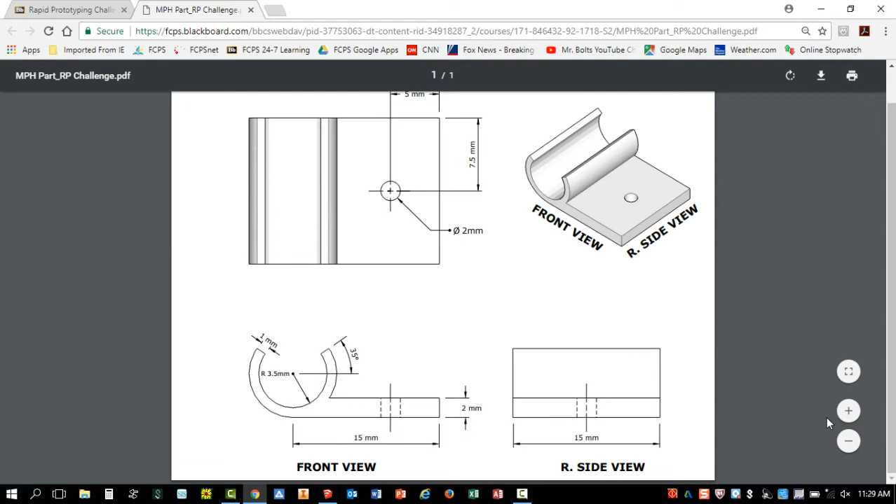So looking at this drawing, there's a lot of information here. Keep in mind that we are going to be designing this in millimeters as we go through this tutorial. Okay, so let's go ahead and get started. First things first, I'm actually going to start with the front view, this portion right here. You'll notice that this has a radius of 3.5 millimeters. Now that's from center to this inner edge, but then we're going to use a tool called offset to add this thickness of 1. Okay, so here we go.

Okay, so here we are back in SketchUp, and first thing I want us to do is change this to the front view. So we're going to look up here at our views. I'm going to click right here, front, and don't zoom in, zoom out, just leave everything as it is. But I will say this next step is important so that the step that follows works the way we want it to. So I'm going to hit C for circle, and I'm going to ask you to click with your left mouse button right at the origin, just single click once and release.

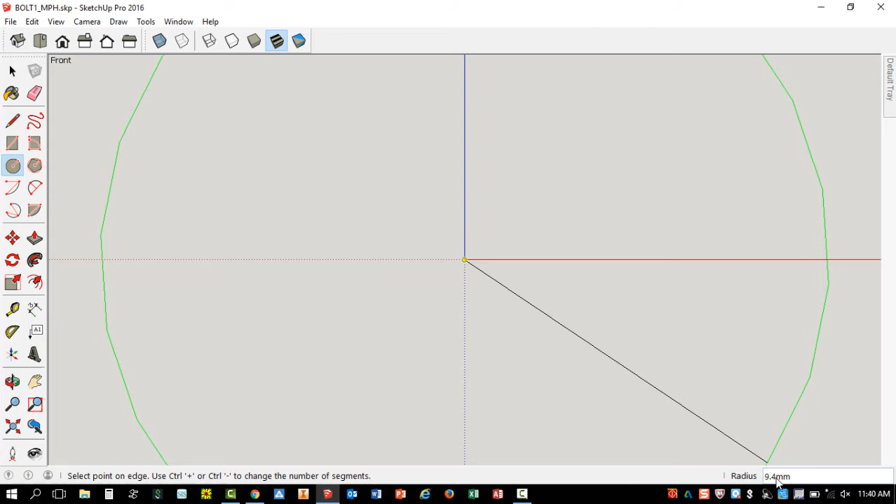Now let's move either directly up, that's fine, or you can move directly to the right. So red or blue axis, but I just want you also to know that down here is where this number is going to appear. You do not have to click here. Just move your mouse either directly up or directly to the right. Stay on either axis and please type in 3.5. Hit enter.

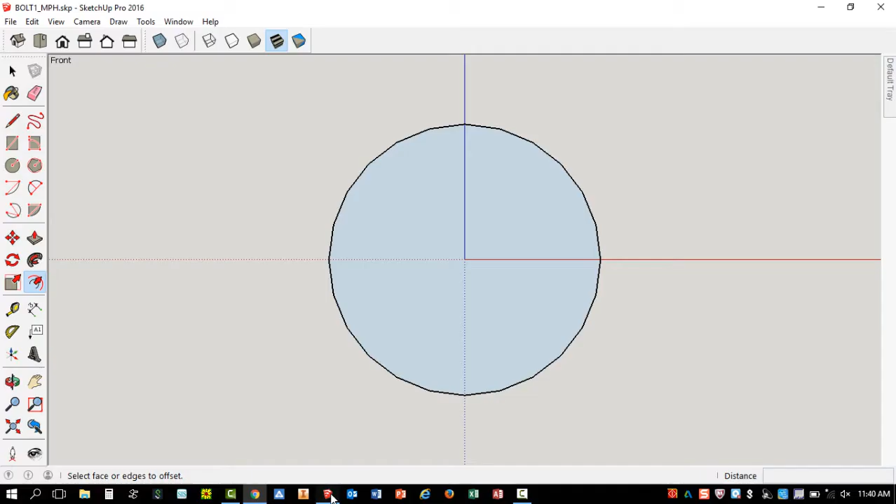Okay, we're going to use a tool called offset right here. Single click with your left mouse button. If you recall, we had an offset here of 1 millimeter from this circle that we just made. So I'm going to go ahead and single click right on the edge. Just pick any edge. You can see it turns blue. Click once. Do not hold down your mouse button. Just move outward. And once again, in bottom right hand corner, you can see this number is going to be adjusted. And now we're just going to type in the number 1 and hit enter.

Okay, so here's why earlier I wanted you to move either directly up or directly over to the right. We're now going to make this piece. This is a rectangle at first, which is going to have some pieces and parts removed like this corner. Keep in mind we have an overall length of 15 and a height of 2. So we're going to go back to SketchUp, and here's once again why this was critical earlier.

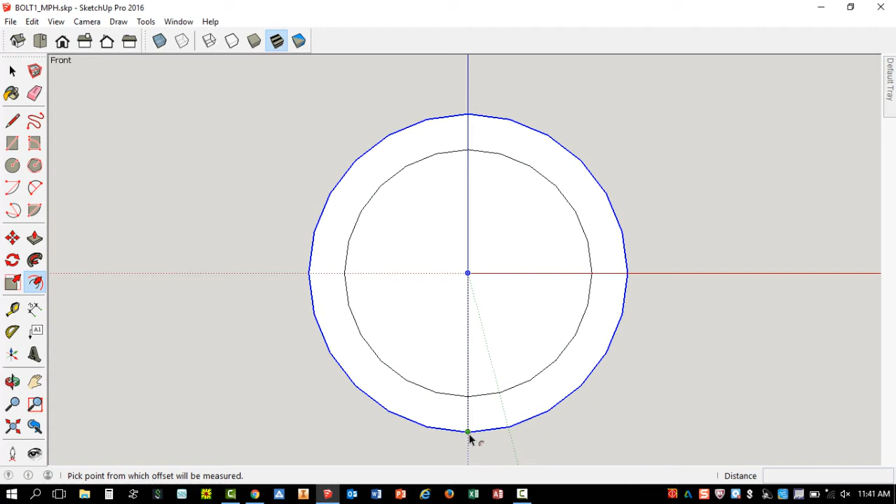You're going to find the point we want is right here. It's right where these two edges that you actually see on these circles sometimes, you see these edges, it's right where they intersect, right where they connect. And we want to make sure we're going to be clicking here with our rectangle tool. So I'm going to hit R for rectangle.

I'm going to zoom in so you can see what I'm referring to. But I want to click right at that point. This is extremely important. If you're not seeing this, please stop the video and have Mr. Bolt come help you. So I'm going to go ahead and click once with my left mouse button. Just release the mouse. I'm going to zoom out so we can see what's happening.

I'm going to move up and over to the right. And once again, I don't have to try to find these numbers. I'm just going to type in 15 for the length, comma 2 for the height, then hit enter. Okay? A few tricks we've learned.

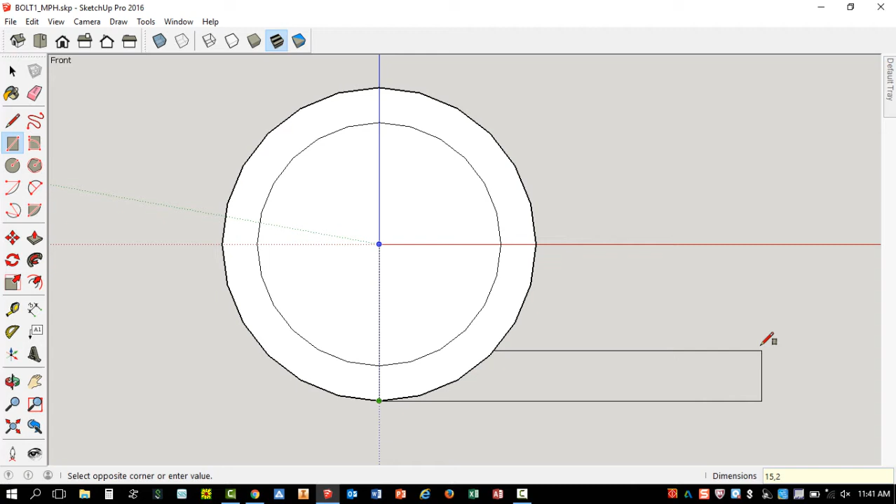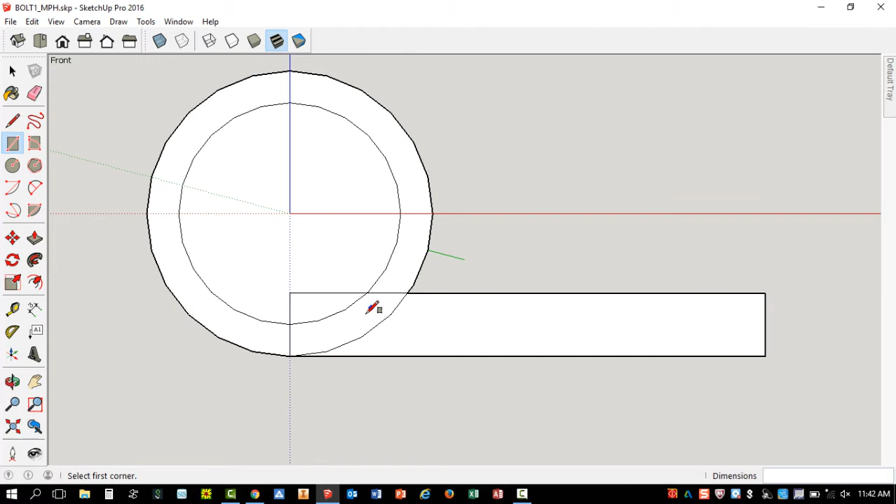If you double click your mouse wheel, everything should fit on the screen. Some of you also know that if you go to Control Shift E, that's also a very good trick. Actually, the double clicking of the mouse wheel, I'm sorry, that's for my Inventor users, my 8th graders. But Control Shift E works great. Okay, so we're not going to clean up anything yet. We're going to do one last step here.

If you take a look once again on this drawing, you'll notice that I have this 35-degree angle. This is how we get this and this to appear, and then we know how much to erase. Keep in mind, we're working strictly off the front view right now, but in a minute we're going to be using some of these other views to figure out some of this other information.

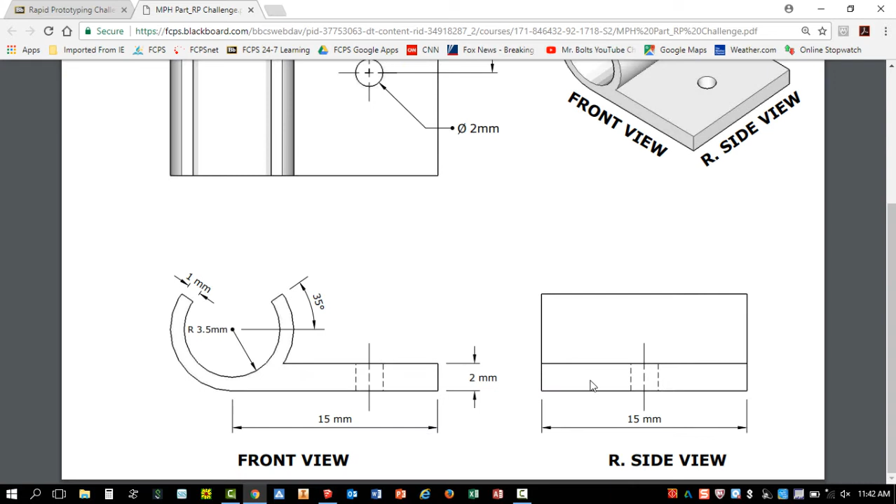So let's go back and let's go ahead and use a tool called Protractor. It's right here on the left. And I'm using the large tool set, so the large tool set allows me to use a protractor. I'm going to single click with my left mouse button right in the dead center of this drawing. That's called the origin. Single click, and I want you to release your mouse, and here's what you need to tell SketchUp first. Tell it what 0 is in terms of degrees.

So let's just move straight across, and you can really click anywhere on this red axis, but you have to be moving to the right. And I can just click right over here. Why not? We'll click right here. And now I'm going to move my mouse up and over to the left, and once again I can type information in, but as you see in the bottom right hand corner as I move this angle, you can see it appear, but I'm going to type in 35 and hit enter.

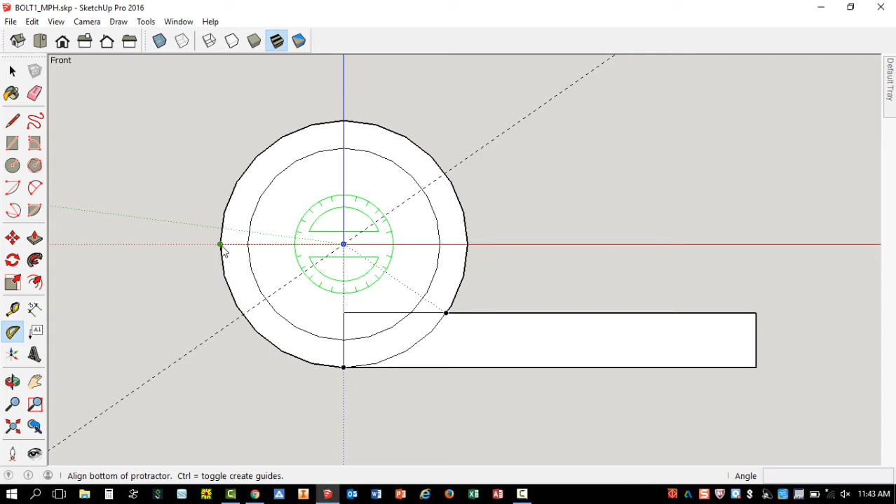Okay, so you can see we now have a 35-degree angle, meaning this was 0. We went up 35 degrees, we have a 35-degree angle. Let's do the same thing here. So we single click with our left mouse button, move directly to the left this time, and once again I'm going to stop right here because I can. Clicking a second time, and now I'm just going to move in the direction I want the angle to appear, and once again I'm going to type in 35 and I'm going to hit enter.

Okay, so what does this do for us? Easy. Now we can take the line tool, or L on my keyboard. I'm going to zoom in really close so you can see what I'm doing, and you have to get right on this target. You want to get where this protractor line intersects with the edge of this circle, and here's the word you want to see. If you put your mouse right here, the word intersection is important.

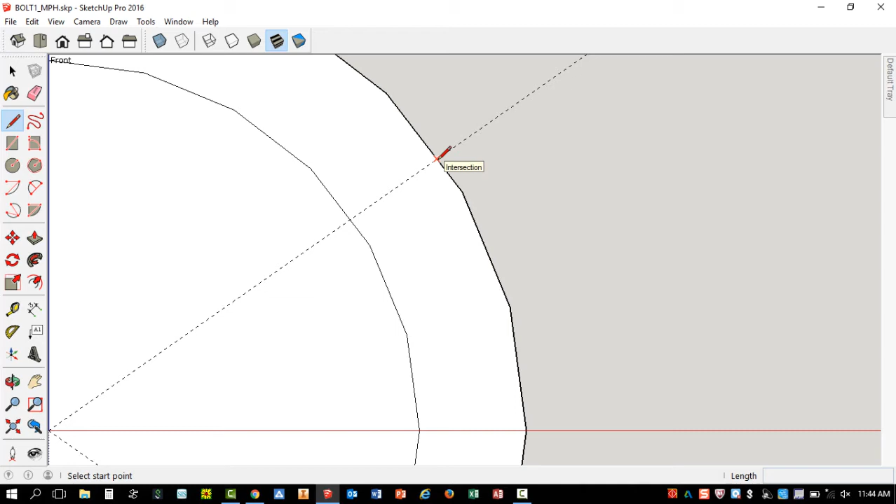So click once with your left mouse button, and just go right to the center, the origin, and click a second time. Okay, now I'm in the drawing tool, and I'm going to hit my escape key just to get out. Okay, so we just want to take a look. This should look just like so. And the reason I hit my escape key, sometimes I've found that if I keep drawing this line, I have had issues and errors before, so I'm just going to start fresh.

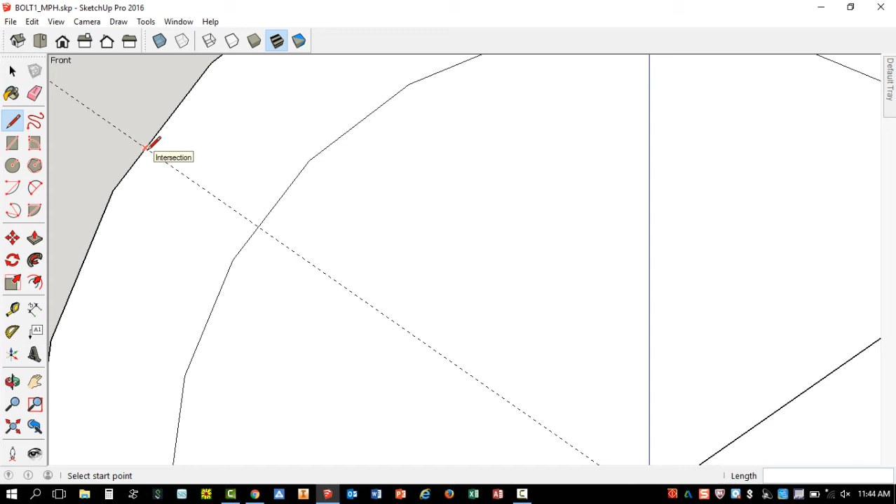Once again, right where the protractor line intersects, click once with your left mouse button. I'm going to zoom out. I'm going to come here. You can see something interesting. My line's not appearing. Well, watch what happens when I click that second time. It appears. It's a little SketchUp glitch.

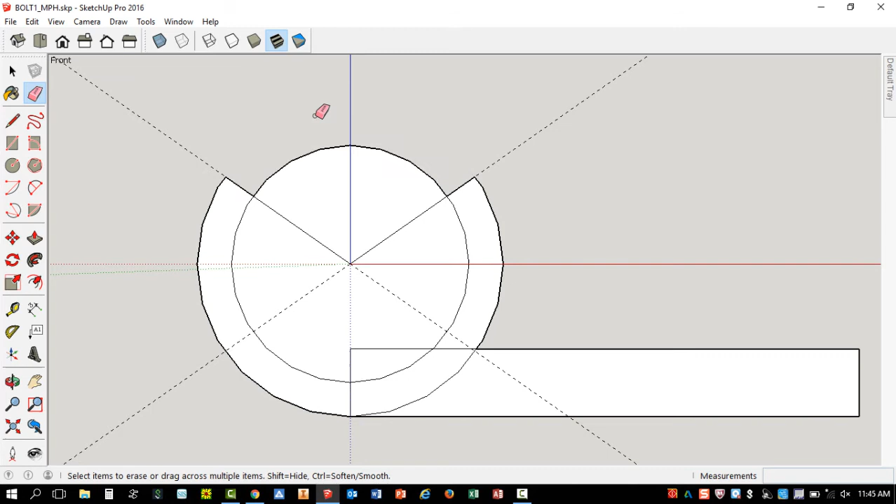Okay, so now we're going to clean up this drawing. So we're going to do a bit of erasing. We're going to hit our eraser tool, and I'm going to start getting rid of some stuff. So I'm going to get rid of this. I'm going to get rid of this. If you look inside here, we don't want any of this information. We want what's on the outside. So I'm going to click here, and I'm going to click here just in case. I doubt there's a line here, but sometimes because of the axes, you can't see it.

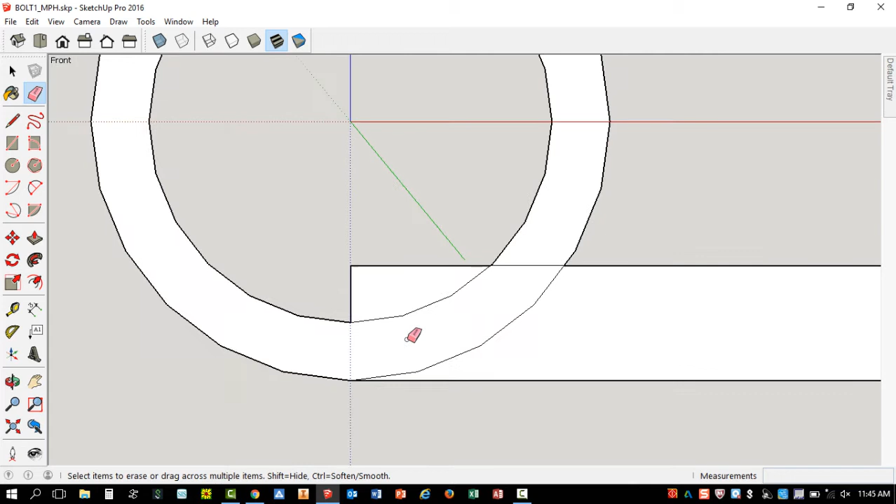This is a line some kids are probably going to forget, this one right here. So make sure we click right on that blue axis. And we're going to get rid of this information inside as well. This is very important. Your pencil will not fit if we don't get rid of this and this. And we're just going to clean this up. Don't forget this line right here. Okay, so just take a close look. If you do this right, your push-pulling is going to work on the next step. If not, then you're going to see parts of your part push-pull.

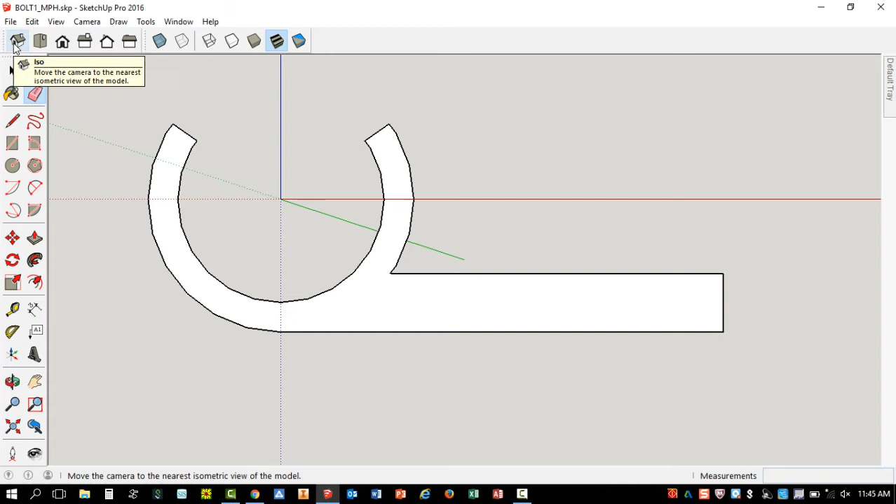Okay, so I'm going to go to an ISO view. Always important to be in some type of isometric view whenever you're going to do any type of push-pulling. So I'm going to hit P for push-pull. I'm going to find this face. You can see the entire face is dotted. That's a good sign. That means I didn't leave any extra lines. I'm going to click once with my left mouse button. Just click once. Move away from you, and once again, just type in a number. The number, if you look at the drawing, is 15. I think it's listed in your right side view as the width. So I'm going to type in 15 and hit enter.

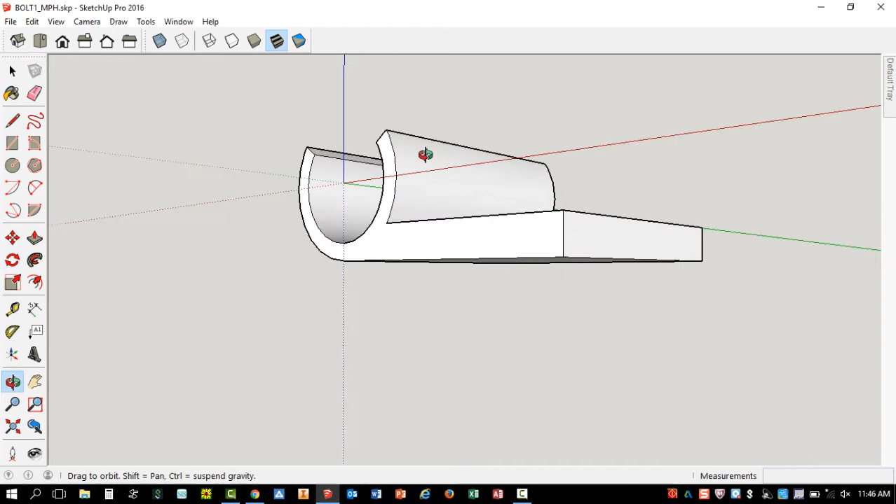Okay. Now, good time to save. I'm going to hit File, Save. I've saved it once. All I have to do is hit Control S. You can see I have the correct file name here, last name, period number, and then MPH. Let's just kind of take a quick look. That looks good. That looks great. If I look at this from a front view, okay, it's a bit in a perspective mode, which is why it kind of looks a little different from your ortho views. But this is looking good so far.

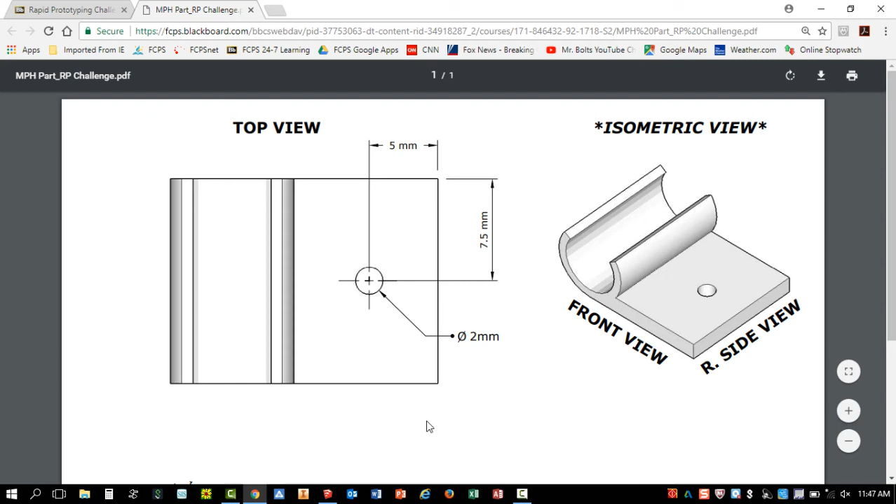So what we want to do is just put that hole in. So I'm going to go back to my drawing, and now we're going to look at our top view here. So if you take a look, this hole has a 2 millimeter diameter. So the radius is 1, but the overall diameter is 2. This hole is centered and 5 millimeters in. So you can see that this is 7.5. Overall width of this part is 15. So knowing that this is 15, middle is 7.5, we go 5 millimeters in. And that's where we make this 2 millimeter diameter hole. So it's going to look something like this. This is actually very simple.

I'm going to hit T for tape measure. I'm going to find this edge, just hover right on it. Just click anywhere on this edge, doesn't matter. Just click on that line. Move towards the inside. I'm going to type in 5. Once again, that appears in the right corner. Hit enter. Now this is the beauty of SketchUp. I don't have to do any more measuring here. I can just hit C for circle.

I'm going to go ahead and just move my mouse along this edge until I find the midpoint, and it's right there. So once again, you got to find that midpoint. Now move directly in. Look at that red line up here. And the second you hit that tape measure mark, you have found that location. So I'm going to single click once with my left mouse button.

I'm going to move in any direction. This time it doesn't matter what direction you move. And just type in, remember, it's the diameter of 2, but SketchUp wants the radius. Radius is 1. Hit 1 and hit enter. Okay, I think we're just about done here.

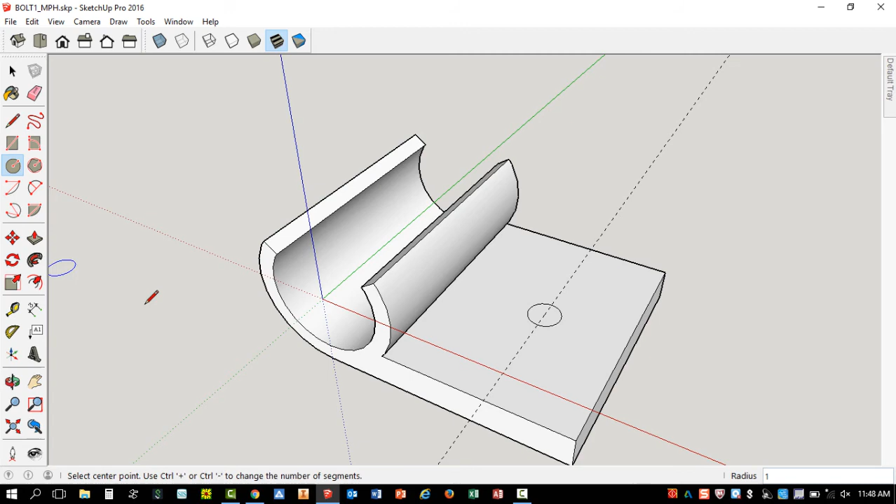I'm going to hit P for push pull. I'm going to zoom in. And this is where X-ray can come in very handy. But watch what I'm going to do here. I'm going to make sure I'm push pulling this, not this. So I click once with my left mouse button. You may have learned this trick in one of my videos.

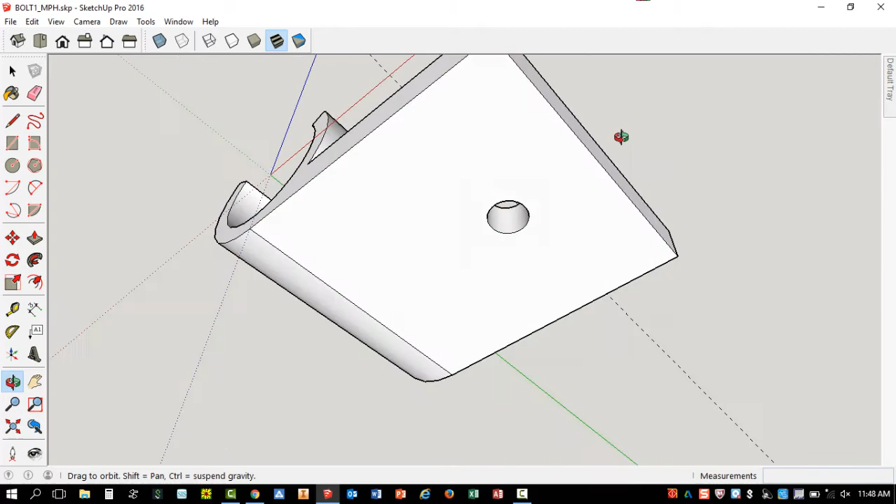If you touch this bottom edge of this part, here, here, doesn't matter. When I click a second time, I use my orbit tool, I should have gone all the way through. And that's just what happened. If not, hit Control Z, try it again. Okay, here's something cool, X-ray. So with X-ray, you can really see that hole going all the way through your part. Very cool. Okay, let's go ahead and do a quick save, Control S.

Okay, last step, folks. We're going to get this prepped for printing. So I'm going to ask you to hit your arrow tool, or your space bar does the same thing. You can do this a few ways. You can either triple click with your left mouse button. Everything gets selected. Or, here's an easy way. Just click and drag, put a big box around the part. It's okay if this does not get selected, not important.

Now, what we're going to do is we're going to rotate this for 3D printing. It's going to make it a little bit easier for us on the printer, and it's a good thing to know. I'm going to click on this rotate tool, and here's what you got to remember. This is simple. Just move the protractor. It looks like a protractor, even though it's a rotate tool. Just move it anywhere along this edge, okay, anywhere.

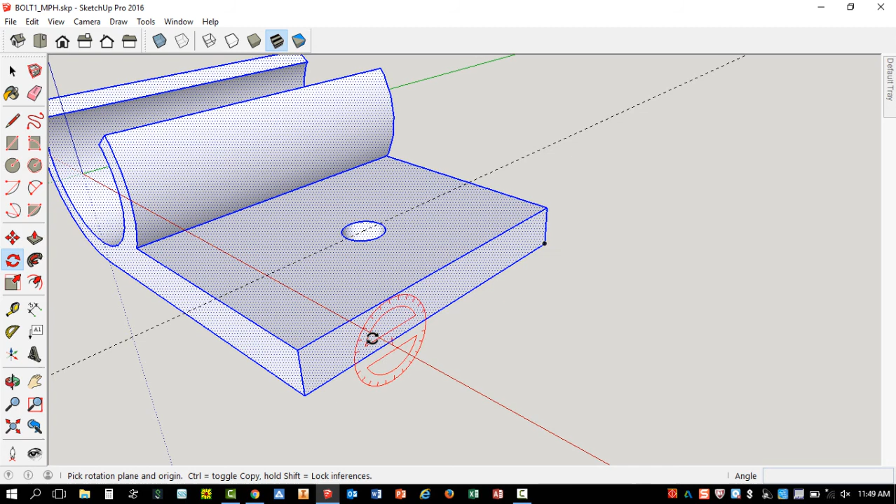And I'll be honest with you, I'm going to keep it simple, I'm going to put it right at midpoint, okay? But honestly, you could also put it here on the end. You could put it here. You just have to make sure that you see a red protractor, okay? Midpoint is fine. I'm going to click once.

Now I'm going to move my mouse to the left. So just make sure you kind of move to the left. And at any point you can click. It doesn't matter where. I can click here. I can even click here. You can see a green axis here. I can click right here.

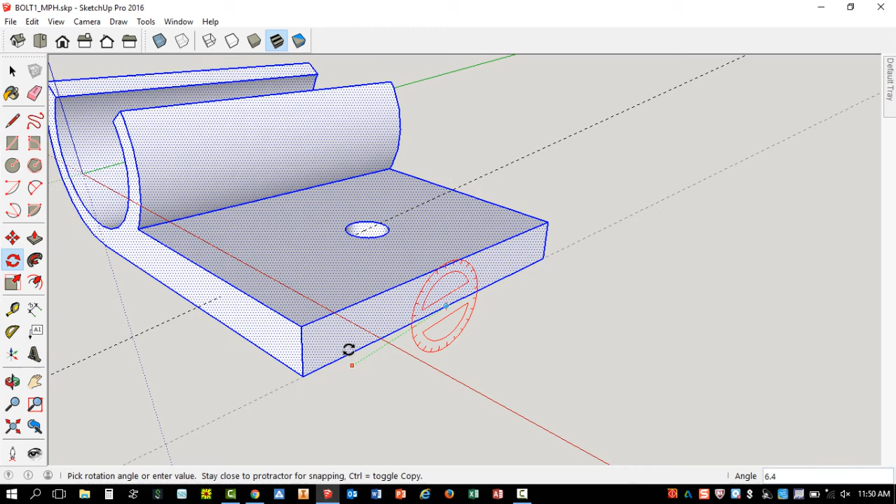I'm going to click a second time, and as I move my mouse up, once again, keep it simple. You can just type in the number 90. But typically, SketchUp snaps to a 90-degree angle. You can see right now, bottom right-hand corner, it says 90. But let's just say it was moving. Type in 90 and hit enter. Excellent. Perfect. We are done.

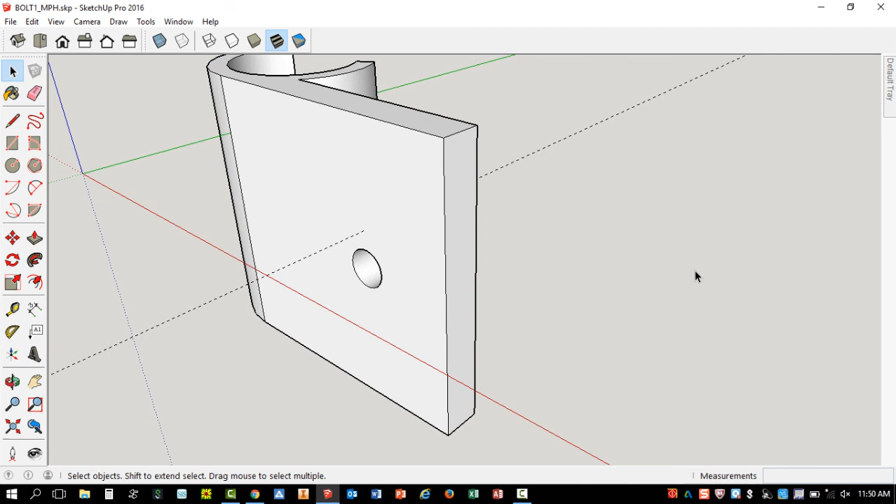So I'm just going to click on arrow, click off my drawing, Control Shift E. If it's bothering you, you can erase that tape measure mark, but that's fine. You can leave it. But one last time, folks, Control S, and that is complete. Do not worry about the fact that your part is not at the origin, okay?

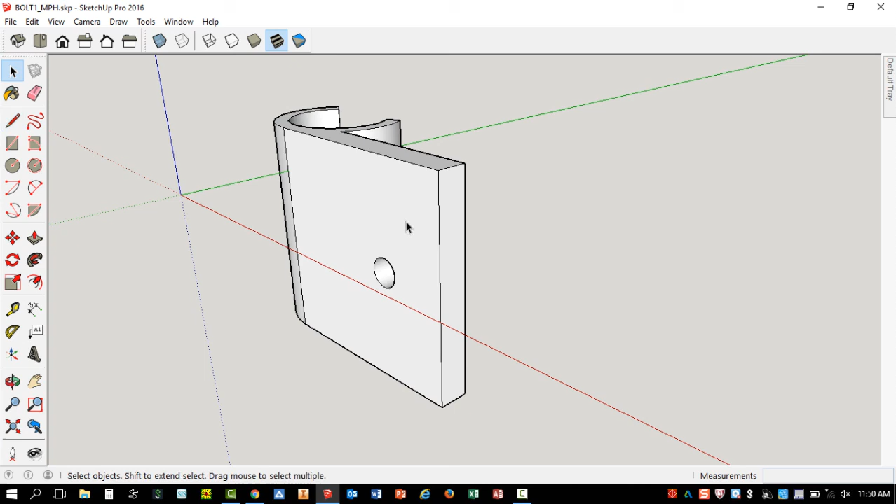If you're one of these people like me that's got to be just perfect, remember what I showed you. Triple click, left, left, left, okay? Here's a cool tool. Move, grab that corner, click once. You see the model's entirely blue, which means everything's selected. And I can just pop it right there, left click again, Control Shift E. Once again, you want to do that one final step, knock yourself out. Other than that, I'm ready for printing.